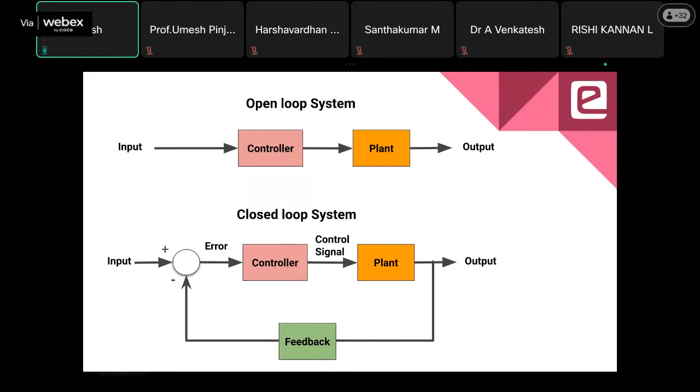The same thing if you see over here, there's an input named r(t) and output y(t), and r(t) minus y(t) will give you the error, and this error is given to the PID. PID stands for proportional integral derivative. We will be discussing this in a very brief manner. The summation of these terms gives you the controller output, which is termed u(t).

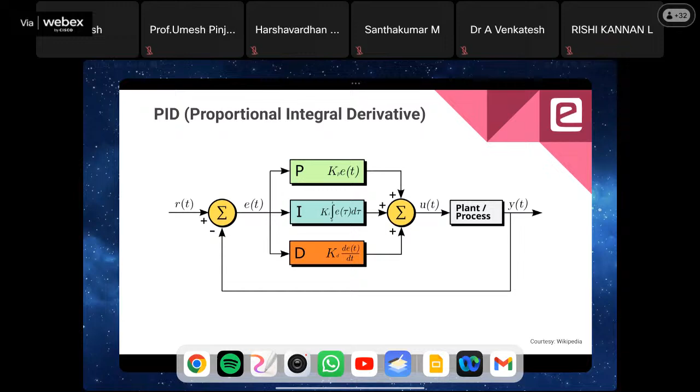I would like to, yeah. Now, Kp into error plus, it's actually Ki. So this Kp, Ki, you can see in the code. Kp, Ki, Kd. These are the corresponding PID constants that will be multiplied in the system.

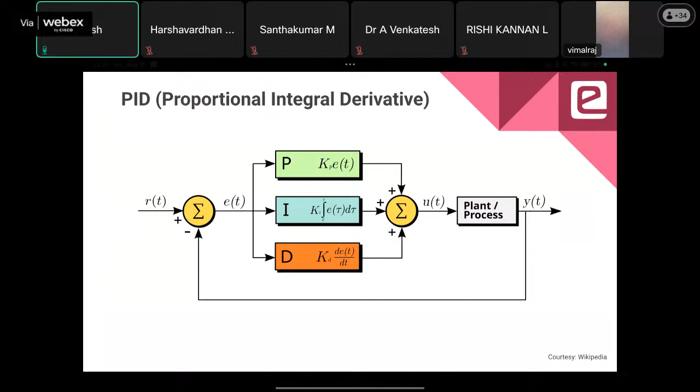And the proportional term is only having the error, and the integral term is having the summation of the error. And derivative, as the name itself suggests, is having the rate of change of the error with respect to time. So the equation is Kp into error, plus Ki into integral of the error, plus Kd into derivative of the error.

So first we are going to see only the Kp into error. So if you see here, I'm considering only this control for now.

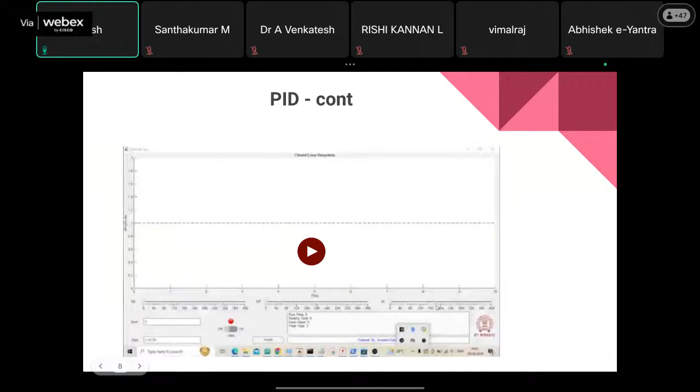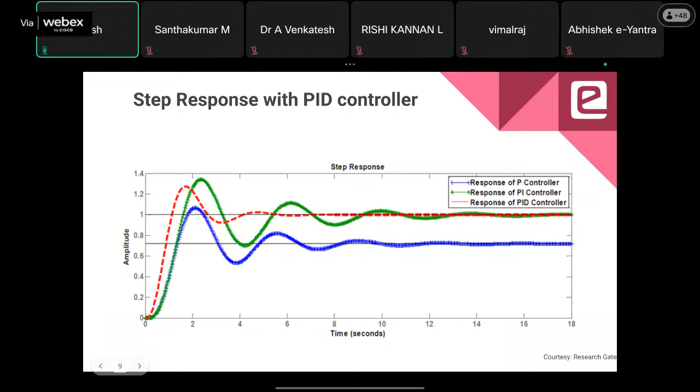Now we are introducing the Kd term. So the Kd term removes the oscillation and you are getting a smooth curve. So this is how PID tuning is usually done in the observation-based tuning method. This is the same graph, but just a normal one. The desired location was 1, but initially it was at 0.7. It was having steady state error.

So let's see about the advantages and disadvantages. Hi Dion, how are you? I think I can hear some sound. Can you mute? Okay.

So the advantage of PID is there is no need for a model. There is model-based control for PID, but in most cases, without the model we can just do it by observation. We can do the tuning and get the desired value that we want. And also, even though the modeling is not perfect and there is some uncertainty, this will take care of that. There's no need for a model, but still.

And the disadvantages, if you see, since we are not considering the model, the observation method is mostly by hit and trial. So for some systems it's very easy to tune, and for some systems it becomes very difficult in tuning the three parameters, because there are three parameters.

So in real life, varying one parameter will affect the other parameters that were set previously. So if you are tuning P, I, and D, and then the second time you are trying to just change the derivative part, it will have some more effect on the proportional side. So we need to actually tune the P as well. By varying P, then we need to think of I. So you need to tune the three parameters.

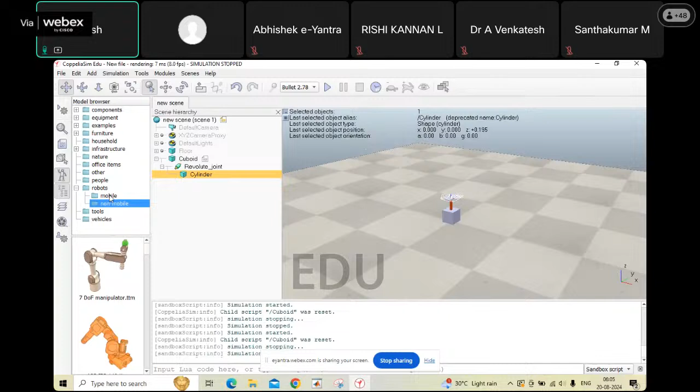So this is how CoppeliaSim looks. Like I've told you, there are inbuilt models you can see. You can just work with them, and you can see the scripting also, how it's written, so that you can explore it yourself. For exploring purposes, you can use the user manual. It's a very well documented user manual.

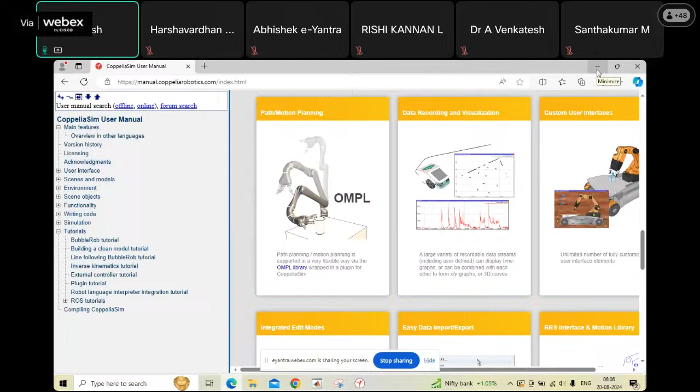So you can go through the overview and what things are present, what you mean by a scene, and you can see some tutorials also. This is not the scope of this session. So I'll just show how to make some simple shapes. Okay, so I have made this shape. This is a cuboid that you can see.

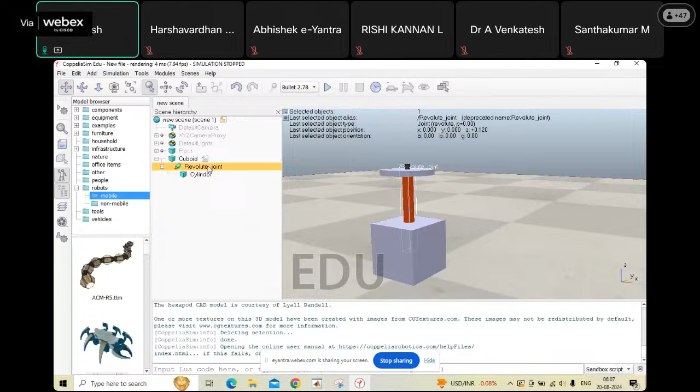So this cuboid is a parent; there's a hierarchy you can see. We call it the parent-child hierarchy. This cuboid is the parent of the revolute joint, and the revolute joint is the parent of the cylinder. You can change the hierarchy if you want, but I made this hierarchy so that the revolute joint is attached to the cuboid, and I hope you see how the joint works.

There are three types of joints. To get these, you can right click here and see primitive shapes, where you can see many shapes, like cuboid, cylinder, and so on, and you can explore this. And there are three types of joints: revolute joint, prismatic joint, and spherical joint. The revolute joint will make the object revolve around its axis. So I've used this joint to make this particular shape.

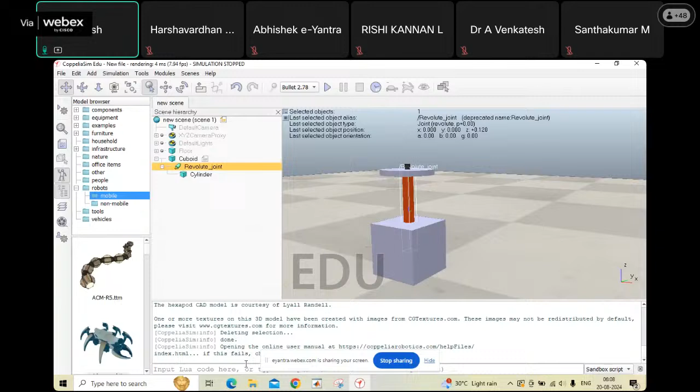And there are dynamics of the joint. The dynamics may be free. In a free joint, the joint won't do anything; even though we are giving velocity or anything, it will stay in the stationary position. You can explore this by installing this simulator. Okay, and you can use the API. So if I'm running it, I think you can see it's rotating.

So if I want to change the direction, I can, but before that I need to say something. You can see there are so many objects out there, like cuboid, revolute joint, and cylinder. Everything has its own unique ID. In order to get that unique ID, there is an API called sim dot,

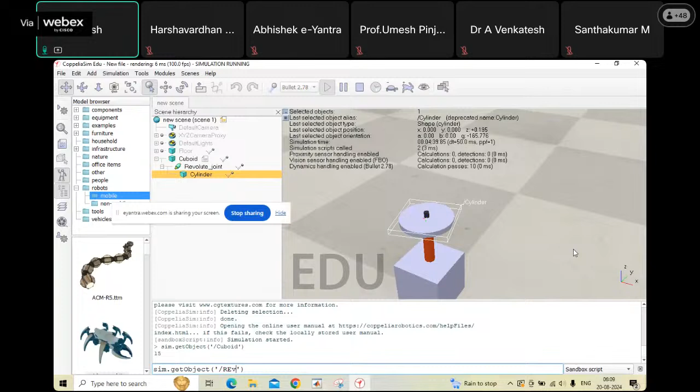and you need to just write the name of whatever object you want. It is called the object handle, and it will be an integer. For the cuboid it's 15. And if you look at the other thing, like the revolute joint, you will have a different one.

It's case sensitive, so it should be mentioned clearly. You can see a different ID. This is called the object handle, which is nothing but the object's ID. Why am I talking about this object ID? Let's see. For example, if I want to give a velocity to the revolute joint, there's another API which is named as

You can use tab for auto completion. What this API does is, we have a joint, and it will publish whatever velocity value we are giving to that particular joint. We know the revolute joint's object handle, but you can see here also what things it requires.

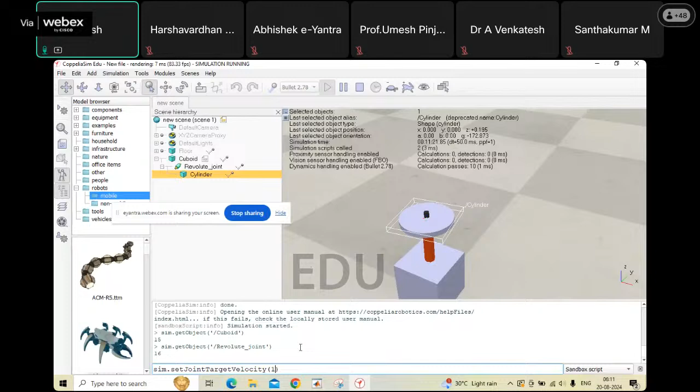You can see that this API requires the object handle, the target velocity, and the motion param, which is an optional argument. So let's start. 16 comma, I'm giving 1. It's rotating in the same direction. Okay, the script is being run. That's okay.

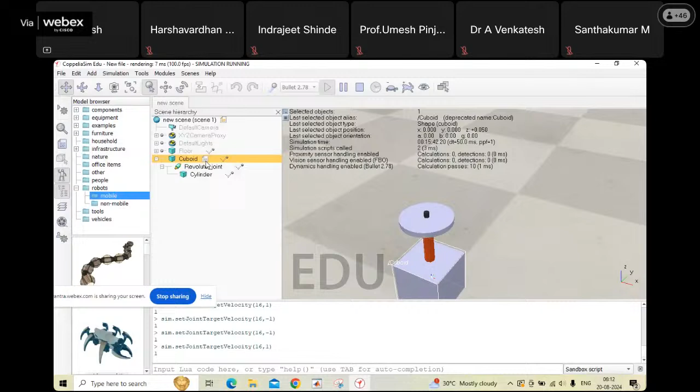Yeah. So the same thing you can do using the script. This script is called the child script, and it's written in Python. Here you need to declare the global values that you want. I'm declaring the object handle, which is an integer, over here, for the revolute joint, and I'm getting the,

this sysCall init function will be called only once for initializing purposes, and this actuation function you can use for giving target velocity to any joints or to some wheels or something.

And sysCall sensing, where there are other APIs which can be used for getting the orientation, position, and other stuff. For example, in case you want to calculate error from the position, everything can be done using the sysCall sensing function, and then the cleanup function. So let's see how the function works. I'm just making it -1.

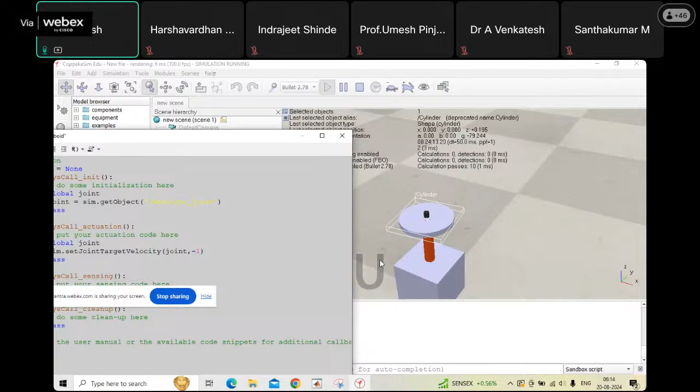You can see it's rotating in the anti-clockwise direction. Now you can see it's rotating in the clockwise direction. It changes its direction. It's running using the script. I'll just reduce this. Yeah, now I've removed it. You can see that it's changing direction based on the sign that we are assigning to the target velocity.

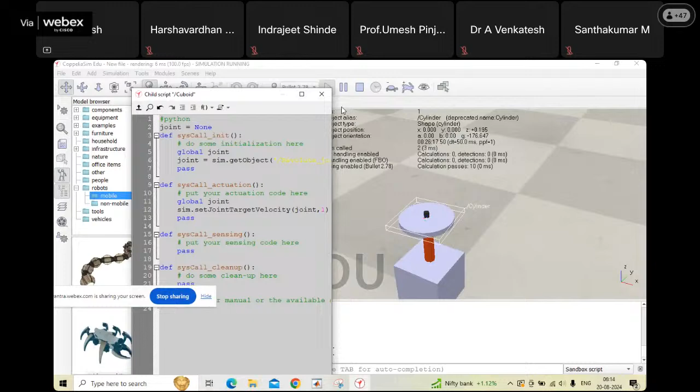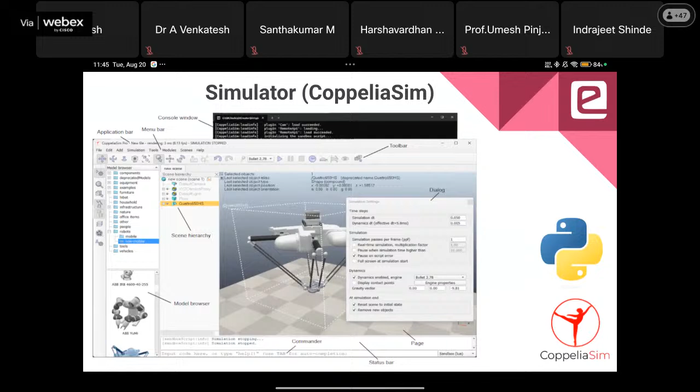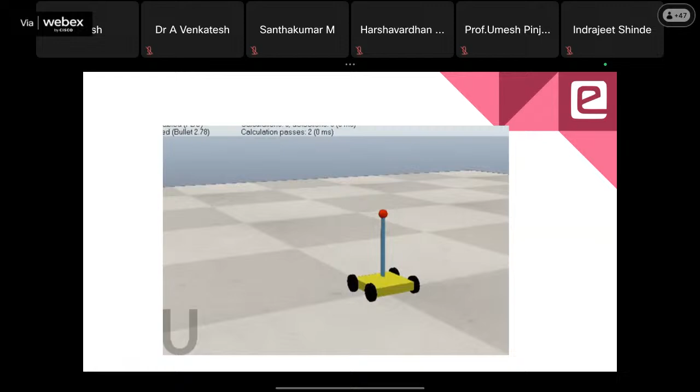Yeah, now I've given you a glimpse of the control system and the things you'll be using. The simulator that I showed is what we'll be using in the control system theme for the stage one purpose. There you will be designing in the simulator everything that you will be doing in the stage two hardware part.

So now it's time to see what the scope of a control system is. There are several applications of the control system. These are a very few handful of them. If you see the bot, it's done by Boston Dynamics. You can see that even just to make it stand upright and walk, you need many controllers, right? It has so many actuators also.

If you're going with a PID controller, you need to have that many PIDs, and for each PID you need to tune. So it's a very hectic process of tuning the PID. You can see the other things also, like the bot which is the four-legged quadruped. That maneuvering is also not a very simple PID thing.

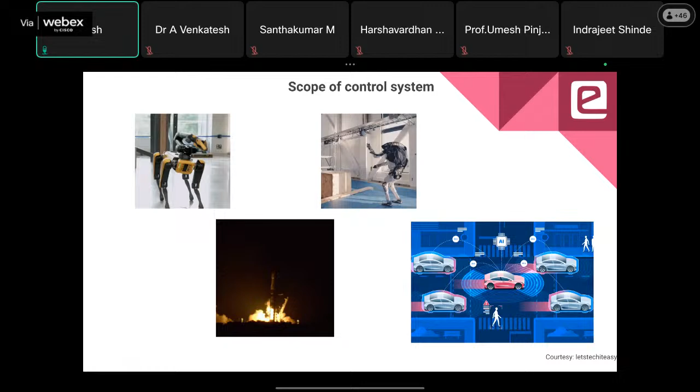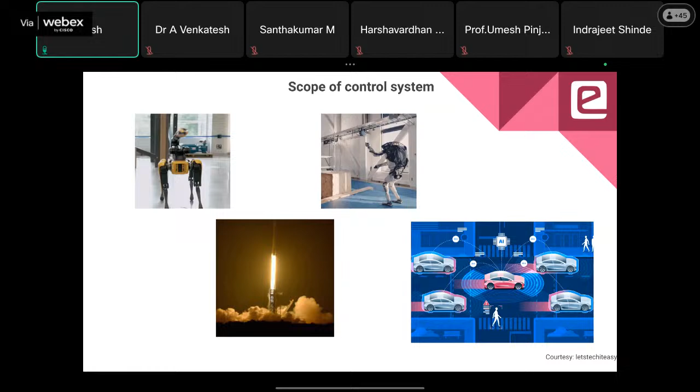So in the theme we will be introducing a new controller, an optimal controller called LQR, linear quadratic regulator. That's not a part of this session; you can learn it in the theme. An autonomous car is also part of the control system, because it takes some sensor input and tries to respond to the environment.

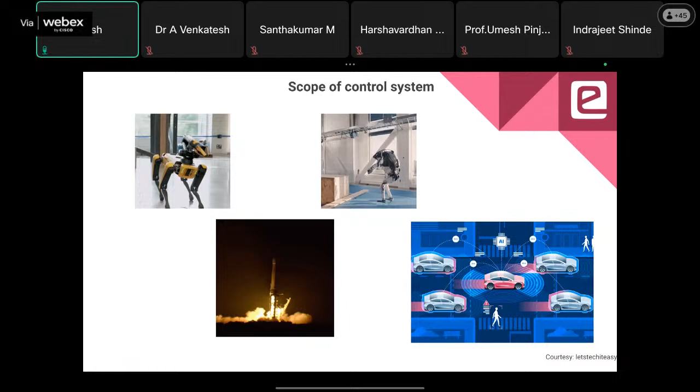So I think that's it. If you have any question, you can just put it in the chat. Thank you. Do you guys have any questions? Any doubts regarding any topics covered or anything? No, sir. Okay. So I hope there are no questions.